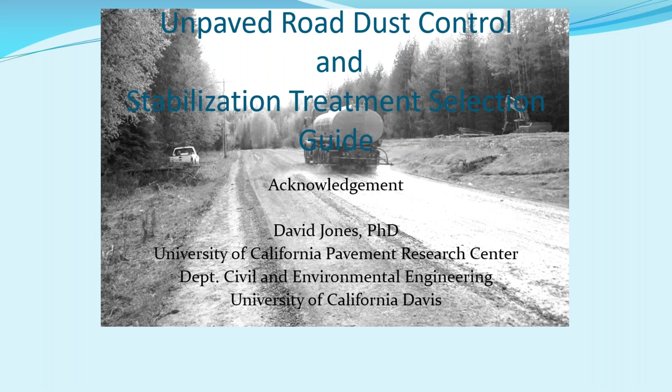So as far as this course is concerned, it's only an hour and a half long, so I've got a lot of information to cover, but today we're going to take a look at some of the gravel roads issues. We'll also look at the design of a gravel road, the purpose, what has a major impact on those gravel roads, the structure of the gravel road, and then the gravel road materials and the need for compaction. Later on in the program, we'll get into the materials a lot deeper than I'm going to today, but we will cover some of that.

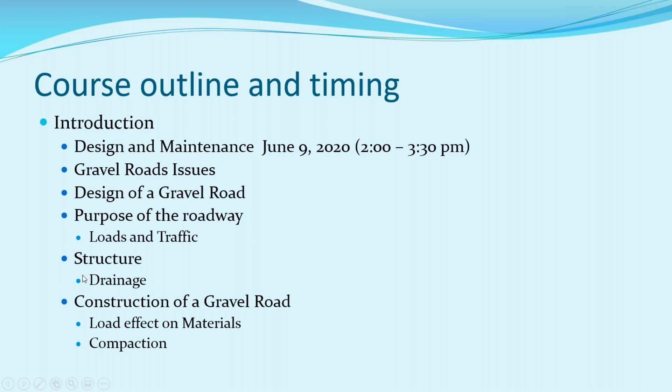Then on June 11th, we'll take a look at the gravel road's subgrade materials, the types of materials, and the issues with frost, freezing, and water on those subgrade materials. Then we'll get into more information about the materials itself. What are the ideal materials? What type of testing or specifications do we need to have with our materials?

That's one of the things I keep telling local jurisdictions: anything you buy, whether gravel road materials, asphalt, or chip sealing material, you need to have a specification for it. And you need to trust but verify that you're getting the material you're purchasing. I've seen it happen a number of times where a contractor will come in and either crush a material, or buy a material that is sold as a gravel road material, but it's not very functional as a gravel road material.

So make sure you have a specification and test the material to make sure you're getting what you're paying for, and we'll talk about what type of tests and how to perform those tests in the materials section on June 11th.

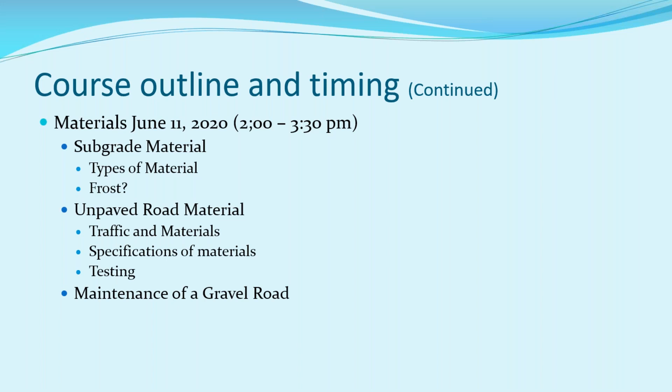Then on June 16th, we're going to be talking about grading those gravel roadways and the importance of doing regular maintenance on them. We'll also talk a little bit about degrading our unpaved roadways by not doing the grading correctly. We'll discuss the need for moisture when you're doing deeper grading, the need for compaction, and traffic control for a grader operation.

And then the final of the 4 programs, which will be on June 18th, we're going to talk about stabilizers.

Stabilizers are an item that I found over the years that a lot of people use a lot of different types of, but a lot of times they don't understand how those stabilizers are going to impact the roadway and what you can do with those stabilizers, what stabilizers can be reworked, what stabilizers can't be reworked. And so I see people going in and installing a stabilizer and then having issues when they come back in and grade that roadway again because it got a little rough.

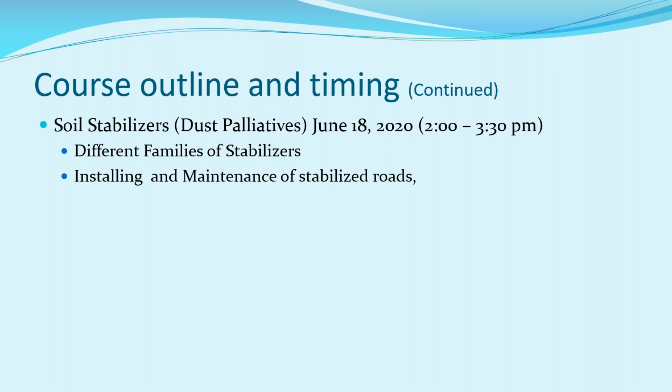Okay, so when we take a look at the unpaved roadway, like a paved roadway, you have 2 primary factors that affect the life of that roadway: the weather and the traffic. The weather, whether it's rain or snow or some other type of precipitation, can impact either a paved road or an unpaved roadway. But there's some differences in how they're impacted, and we'll talk about those in just a moment. Then there's also the issue of traffic.

Now, I hope everybody that's listening that manages unpaved roadways has both a management plan for those paved roadways as well as a management plan for those unpaved roadways, meaning that you take a look at the construction of those roadways, what's the traffic volumes of the roadways, what type of vehicles do you have running on those roadways.

And when you look at the national road mileage, unpaved roadways are a major component. It's almost half of our road system in the United States. Of the 4.4 million miles of roadways that we have in the United States, almost half of them are unpaved. And that does not include the Forest Service roadways, the BLM roadways, or a lot of those other roadways that we use pretty extensively out here in the West.

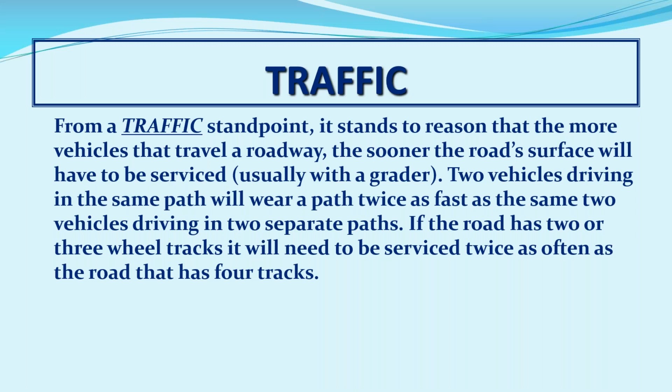So the volume of the traffic, the size of the traffic. I mean, you get out into some of our communities that have the oil wells on them, or they have a big dairy on them, or some of those where they have heavy truck traffic. Those trucks beat the tar out of those roadways. And so sometimes we need to take a look at and maybe upgrade the material that we're using on that roadway to be able to carry that bigger truck traffic, those heavier loads. And so those are some of the things we need to think about.

Well, so far we've got number two, and we got a couple ones and a couple of fours. There's another one. Lots of ones and fours now. Now it's just primarily ones. Okay, there's some more twos. Nobody's picking three. All right, Bruce. Yeah, it looks like 1 and 4 are your winners here. 1 and 4. Okay. Yep.

So potholes are a big issue, which they are on most unpaved roadways, and we'll take a look at ways of dealing with those potholes. We'll also take a look at 4. Dust is a major issue, especially when you have houses out there along the roadway.

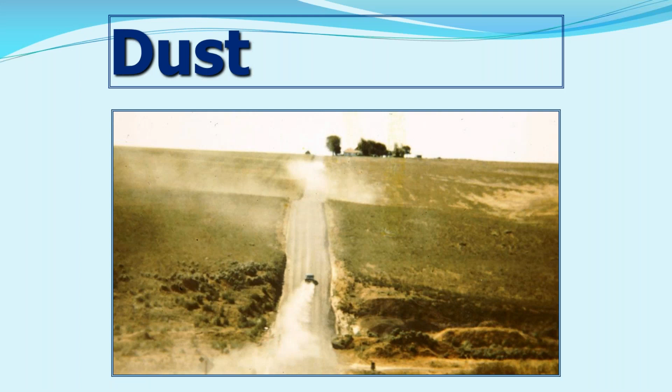So what I want to do now is let's take a look at 7 cost-effective suggestions to manage some of these problems. Okay, 7 cost-effective ways to manage these problems. Road shape. Like I said, our road shape is very important. There's the paved road, the road that has asphalt on it. In a straight section of roadway, we want to have a 2% crown.

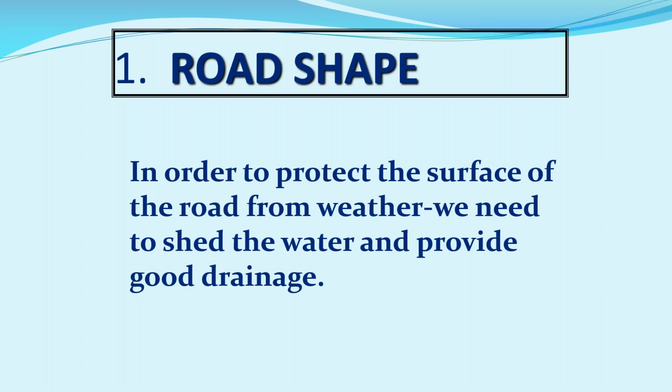But a 2% crown on an unpaved roadway is not going to shed the water the way that it's supposed to shed. And so it's going to create those potholes and those segregation areas, and we're going to have problems with it. So the road shape is very important. Now, what type of road shape do you have on your gravel roadway? Is it flat, parabolic, U-shaped, in and out, or an A shape?

One person responded already, and they said they've always used a 3% cross slope. Someone else has an A shape. Okay. A shape, a parabolic and in and out, an A, an A, an A, parabolic, A shape. Okay. Yeah, for the most part it's A. Oh, pardon me. Sorry. That's okay.

It sounds like a lot of you are saying A shape, so let's talk about each one of these shapes, the impact, and what type of roads I've seen them used on. A flat roadway, I've seen a number of agencies that have a flat roadway. Generally speaking, it's a roadway where maybe the operator doesn't feel he has a lot of time, and so with 3 passes on a flat roadway, he can pretty much grade the material from one side of the roadway to the other, and he doesn't have to worry about a crown, so they can get graded really quickly.

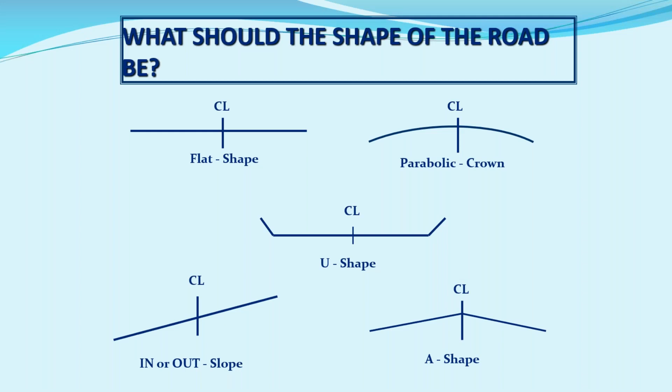A motor grader operator always has a mental picture of what he or she wants to use that motor grader to build, and building that A-shaped type of crown is ideal. You also need to then build your side slopes. Ideally, you want your side slopes to be 4-to-1 or flatter.

4-to-1 or flatter. If you have a side slope along your roadway, and let's say it's a 2-to-1, a 2-to-1 slope is classified as a hazardous slope, because if a car goes off that slope, it's going to roll. And so that's going to create some problems for the people inside that vehicle. Now let's go to a 3-to-1 slope. Well, on a 3-to-1 slope, if a car runs off the roadway, it cannot stop on that slope. It will travel to the bottom. So it still has some hazards. So ideally, we want those side slopes off the shoulder of the roadway down into the ditch to be a 4-to-1 or flatter.

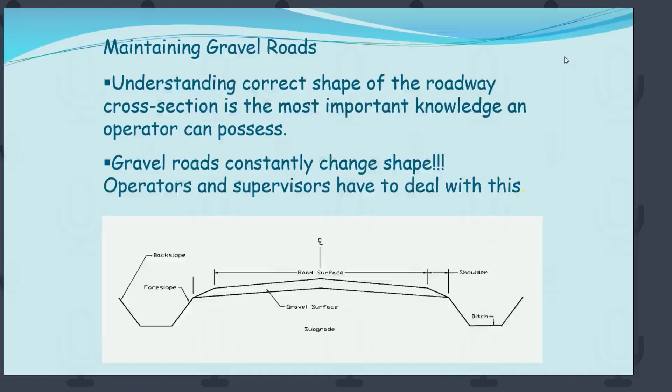Is it still giving you some grief there? Yeah. It's got me locked up. Okay. Well, do you want me to switch over to me running it for you, and I'll just click through the slides? If you can, I'd like that. Yeah. I'll just use the PDF you had sent me that we made available to everybody. So let me get that pulled up here real quick. That's perfect. There's more than one way to get this accomplished. Yes, there is. People in public works are very resourceful. All right, I'm opening that file up on my computer, and I got to get down to the slide where you were at. Sorry. I think it just changed on me. Oh, did it? Yeah, it's to the movie. Oh, well, do you want to go ahead and run the movie then? Yeah, let's go ahead and run the movie. That sounds good. And I've got it pulled up if we need to go back to that when we're finished. Yep, so it's working now, everybody. Oh, excellent. All right.

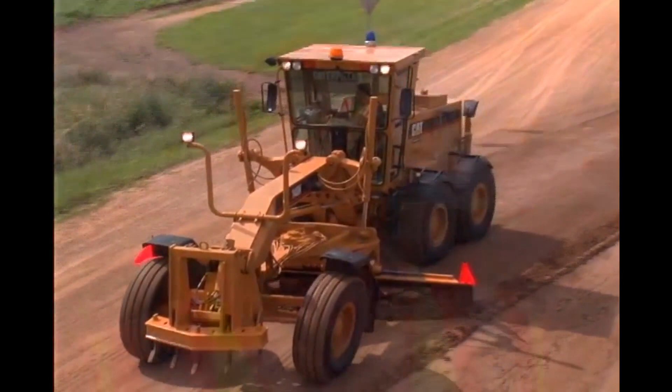Did you know that more than half of the roads in America have a gravel surface? It's true, and that means that gravel roads are a critical part of the transportation system. We depend on them every day to get products to market, our children to school, mail delivered, and to get us on out to the primary roads. And that's why most people are not shy about complaining to public officials when they see problems on gravel roads.

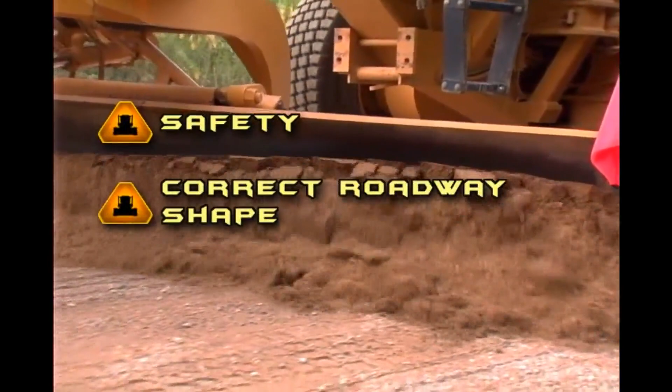So when you are maintaining gravel roads, you are contributing in a big way to the safety, comfort, and convenience of your community. You can really take pride in that. The three most important things covered in this presentation are safety, for you and for the public. Roadway shape, something you accomplish mostly by using a motor grader correctly. And good surface gravel. I'll show you what it is and what it isn't. To do the job right, you have to understand all three.

I'll explain what to do and why to do it, but only your commitment to quality will motivate you to learn how to do it. In this presentation, I'll focus on the shape of the roadway and the shoulders, the parts you drive on. The roadway has to be shaped like this. This is the driving surface, and here are the shoulders. And here are the foreslope, the ditch, and the backslope.

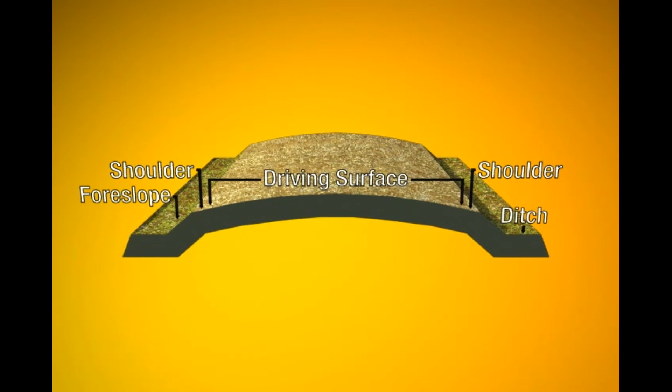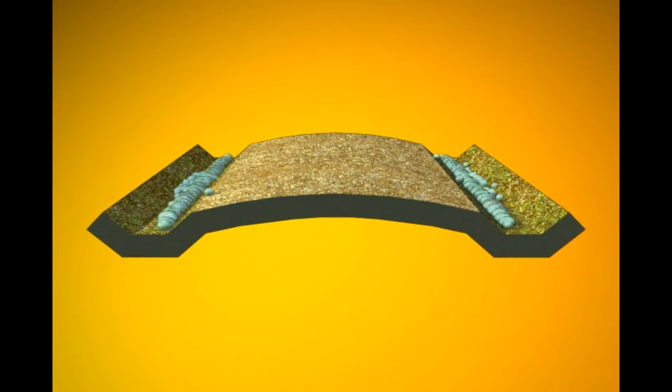The main purpose of the shapes of all these elements is to drain water efficiently away from the driving surface. There are three reasons to maintain this overall shape: safety, safety, and safety. I'll explain. By putting a crown in the driving surface, you're keeping the road safe by making sure water drains off into the ditch. To do that, you need a 4% slope, or very close to that. A 4% slope translates to a ½ inch of drop per foot. So for a road that's 24 feet wide, you should have a 6-inch crown.

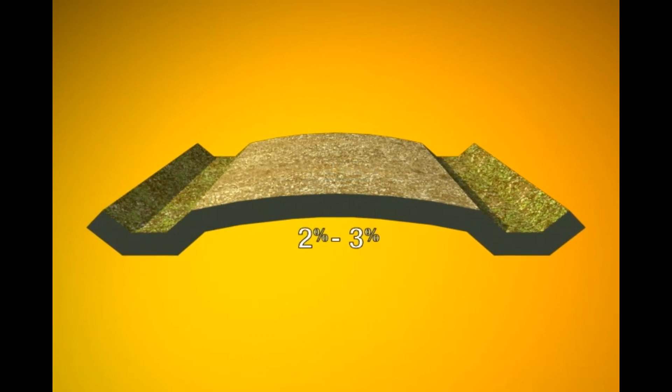A 2 or 3% slope won't be enough to move the water off the driving surface. You'll get potholes and ruts fast. They can form within a day under heavy traffic, and that causes damage to vehicles, or it can even cause a driver to lose control. A road with an excessive crown is also a bad thing. With too much crown, the fine particles in the gravel will be washed to the shoulder under heavy rain. You need them to bind the other material together.

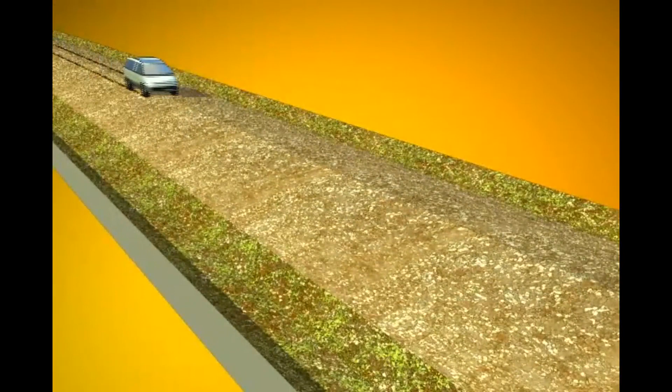The same thing could happen if the road is shaped like a loaf of bread, like this. Furthermore, the loaf of bread shape allows water to collect in the middle instead of draining into the ditch where you want it. Still, another safety factor has to do with where people choose to drive. If a road has excessive crown, people naturally decide to drive in the middle because that's the only way to keep the car level. So, you'll see just 2 wheel tracks like this. Or if a road is shaped like a loaf of bread, you'll see 2 or possibly 3 wheel tracks like this.

In either case, if 2 cars heading toward each other are in the middle of the road, we're in for big trouble. There's an easy way to see if the road is shaped wrong. Just look at the wheel tracks. If they're in the middle like this, it's a sure sign of danger, and you need to reshape that road as soon as possible. Now, having said all of that, there are also places where you don't want a crown in the road, like where the gravel road crosses railroad tracks, or crosses a bridge, or at intersections. In all those places, you need to adjust the crown.

And where the gravel road goes into a curve, you need to change the crown into a super elevated surface. When maintaining a super elevated curve, be sure to move the gravel from the outside of the curve where it tends to accumulate to the inside. That way you prevent the slope from getting too steep.

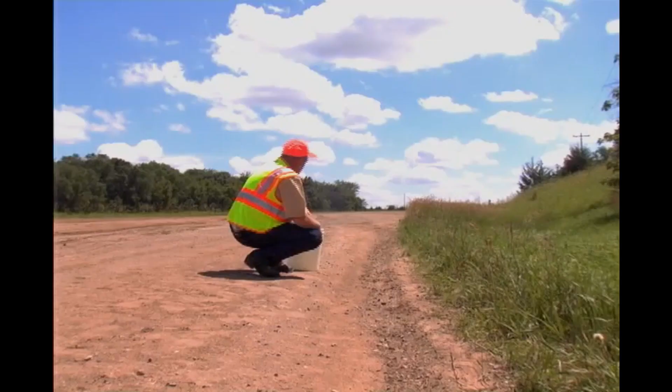Something else you don't want is a high shoulder like this. This can be caused by vehicles whipping gravel off of the surface to the shoulder, or from rainwater moving gravel to the shoulder line, or it can come from snowplows moving gravel to the shoulder line as they plow snow. All of this is more likely to occur when you have poor quality surface gravel on your road. But finally, the high shoulder can also come from incorrect use of a motor grader. No matter what causes them, high shoulders are trouble because they form a secondary ditch which stops water from draining off the road like this.

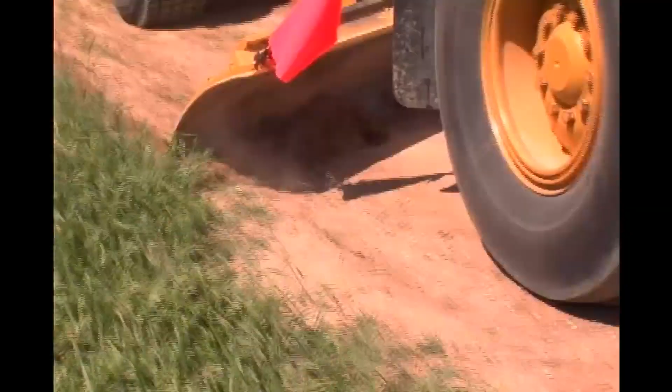So addressing high shoulders is an important part of maintaining overall roadway shape. There's another way to move gravel off of the shoulder or even out of the ditch. That's a shouldering disc, which as you can see here is a lot like a disc used for breaking up soil in a farm field.

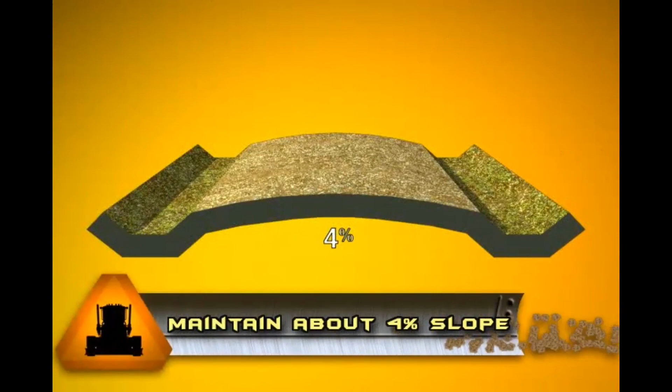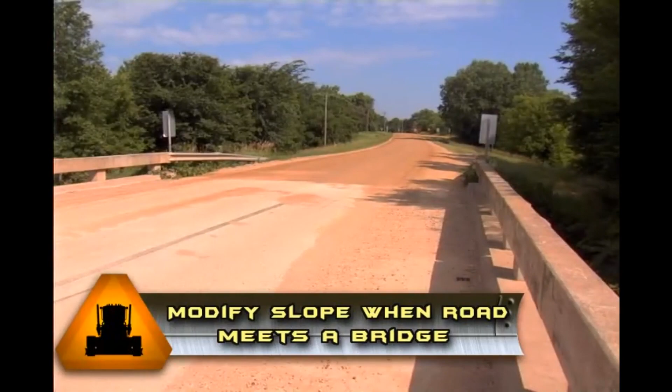I can sum up what we've seen about roadway shape in 3 main points. Number 1, stay at or near 4% slope on the roadway. Number 2, you must adjust that 4% slope when the gravel road intersects with another roadway, with a rail crossing, or with a bridge. Number 3, you must fix high shoulders. In the next section, we'll take a look at the number 1 tool for achieving these goals.

As a quick reminder, Bruce, you've got to unmute yourself too, because the system automatically muted you when the video started. I'm not hearing you, Bruce, so you'll have to unmute on your end. I've sent Bruce a request to unmute himself too through the software, so he should be back on here in just a second. While we're waiting for Bruce to come back on.

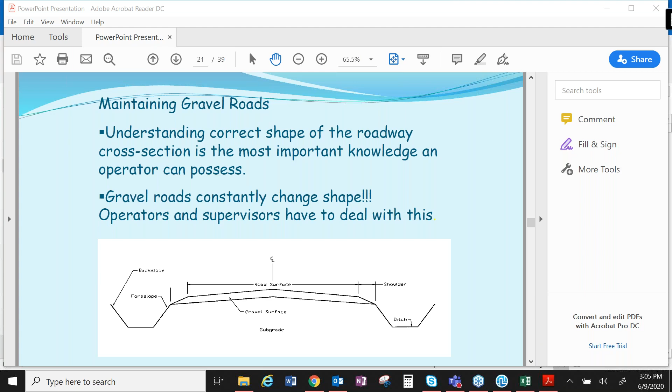So I'm going to make myself the presenter for right now, show my screen instead of Bruce's, and then give Bruce a second. Oh, there you go. He's got unmuted. Was hoping that might do it. Well, it did. Yay, there we go. All right. Do you want to be the presenter again, Bruce? I'll be happy to give it back to you. If you don't mind, can you just go through the slides? Sure, I'd be happy. I don't know why I'm having a problem with my computer. Okay. Like I said, we got ways to figure this out. So you just tell me when you want me to click to the next one. Go ahead and go to the next one. How's that? That's the one right after the video. Oh, yep, that's perfect.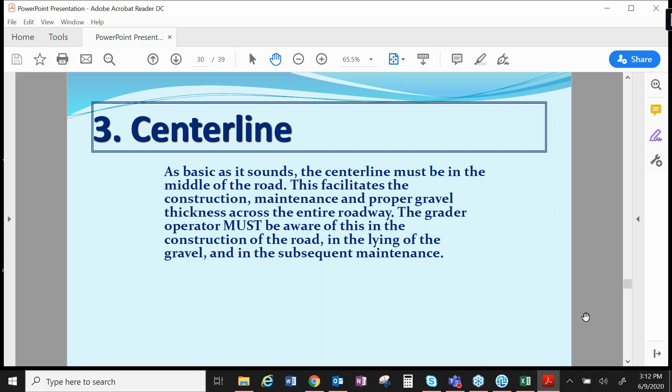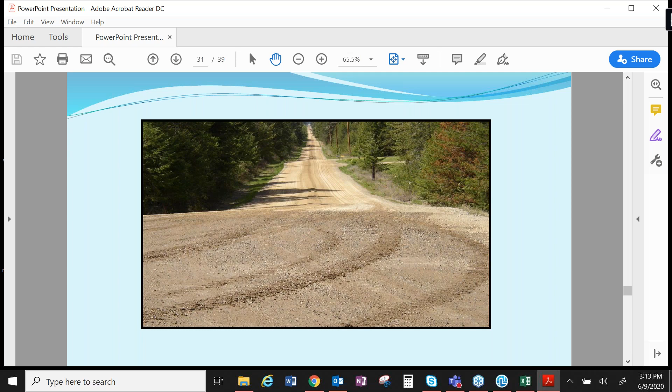It's a picture of a roadway that I worked on up in North Idaho. We're actually grading the roadway out, and we're planning on doing a stabilization treatment, a mag chloride treatment on it. You can see that the roadway in the foreground has actually already been treated, but you look at that berm where the operator has pulled the material up off the shoulder and brought it out into the roadway.

He stacked it in the roadway and made it pretty much in the center of the line of the road. Then he blended that material. He has some moisture in it. It looks pretty dry, but it does have some good moisture in it.

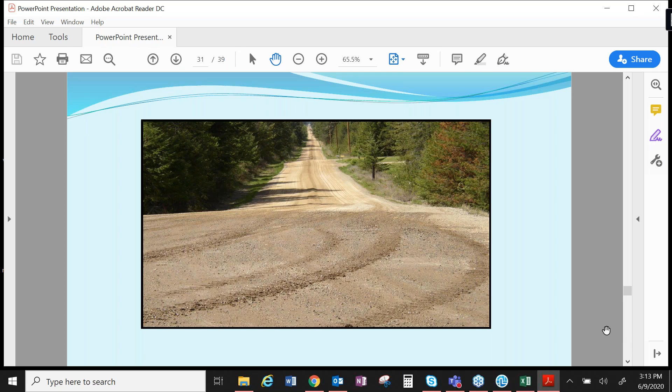And he blended that material back out, and then he'll cut it back out of that berm and take it across the roadway so he can lay it out and create that 4% grade that entire length of that roadway, and make sure that that center line of the roadway is in the center of the road.

So if we can go to the next slide, Victoria. The other thing is making sure that we have a consistent cross slope.

Now, when I first started grading, running a motor grader back in the late 70s, early 80s, I started out on a John Deere and a Galion and a Huber, and then moved up into a Champion and finally a Cat. The first time I got into a motor grader and I was working a section of roadway, the operator that was kind of teaching me had actually taken a carpenter's level and taped it on the window frame.

And then he actually had a mark, and he said, this is where the center of the bubble is, and that will get you a 4% slope. That'll get you your slope. Because I've seen people say, oh yeah, I can feel when it's right.

But the thing is each one of those slight shifts that you have in your moldboard as you're cutting that material or laying that material back in, you're going to create a change in that slope, and those drivers will feel it.

And if they're having to make adjustments to their steering wheel because your slope's going 3% and then going to a 4% and then going to a 6% and then going to a 4%, all those changes, every time that steering wheel is going to move on that vehicle, and then they'll jump onto the center line of the roadway. So they get away from that shoulder of the roadway. So having a consistent cross slope is very important.

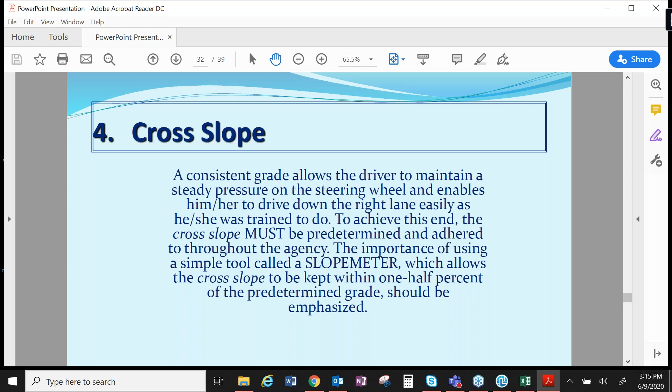The other issue that we have on unpaved roadways is our road edges aren't parallel. It's not consistently a 24-foot wide roadway. It may be a 24-foot wide roadway, but then when we come to a culvert that's maybe too short, our roadway comes in a little bit. Or we have turnouts where the roadway goes out.

That consistency of that shoulder of the roadway is very important to make that driver feel comfortable running on that edge of that roadway, that they're not going to have to keep switching back and forth over the center of the road and back again to get onto their side of the roadway. So having consistently parallel road edges is very important.

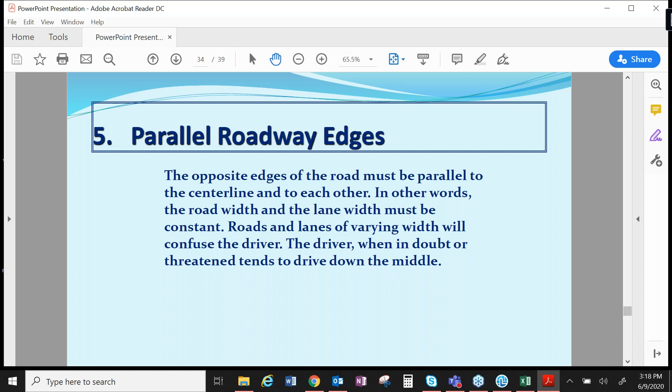And I've seen it happen sometimes where maybe the motor grader operator has pushed the material out a little bit and then had to bring some of it back because he came up to a culvert or to a rock or to a tree or some other obstruction, and he has to go around it. Well, then that inconsistent road edge is going to create the concern of the traveling population. So if we can go ahead and change again, Victoria.

So if we can go ahead and go to the next one.

Driveways. Every one of our unpaved roadways have driveways that come into them. And what I find is that if you have a driveway and say the driveway drops down off the roadway, a lot of times what will take place is as the farmer, the rancher, the individual that owns that roadway wants to make their roadway come into the main road, if it's lower than our road, they'll borrow material out of our roadway and drag it down into theirs a little bit.

Well, that makes a little dip. So as the traveling population travels past that driveway, their car dips towards that driveway, and that makes them uncomfortable. So then they move to the center line of the roadway. Or the other one that I see quite often is if the driveway is above the traveling surface of our roadway, a lot of times people are doing work trying to smooth out their driveway, they'll drag some material out onto our roadway so that they have a smoother transition out onto the roadway, but that creates a bump.

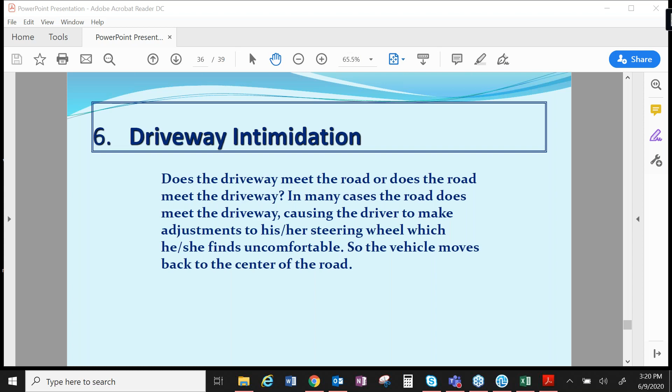And that bump, the driver hits that bump and the steering wheel jumps a little bit, is going to create them a problem. So make sure with your driveways that people aren't taking your material, using your material or adding your material. Keeping the grade of your roadway is the prime emphasis for that roadway. Don't let those driveways intimidate that traveling population.

Let's go to the next one, please.

Roadside intimidators. We see it all the time. Mailboxes. Every local jurisdiction, they may have mailboxes along that roadway. And those mailboxes, especially when they're a cement or a brick mailbox or something massive in size, that'll intimidate that traveling population. They don't want to hit that. Or that farm machinery that's parked on the shoulder of the roadway, or here in Idaho, we have quite a bit of irrigation, and we may have wheel lines that have been left alongside the roadway. All those things alongside the edge of the roadway make that traveling population intimidated, and so they'll move out towards the center line of the roadway.

Or especially in your winter time, if you have snow drifts or you have brush alongside the roadway that's creating a drift or creating a problem, they'll move away from that so that they don't get stuck in that drift. And so all those things make people move towards the center. So we want to eliminate as many of those as possible.

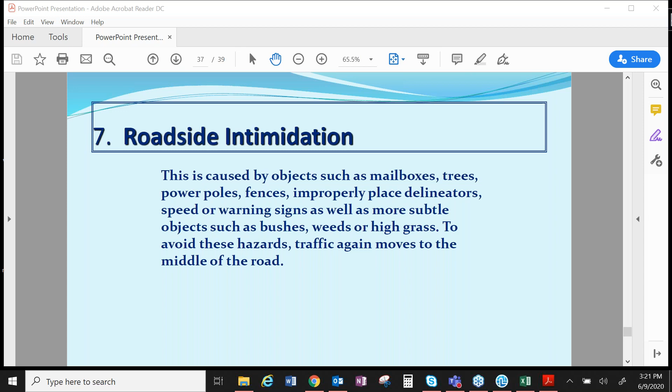So let's go ahead and go to the next one, please.

So you need to think about those things that are going to intimidate that traveling population. Eliminate those. Get those parallel edge lines, get those good clear edge lines so that those people don't travel out into the middle of the road.

If we can go to the next slide, please.

So the three most important things to remember about a gravel road.